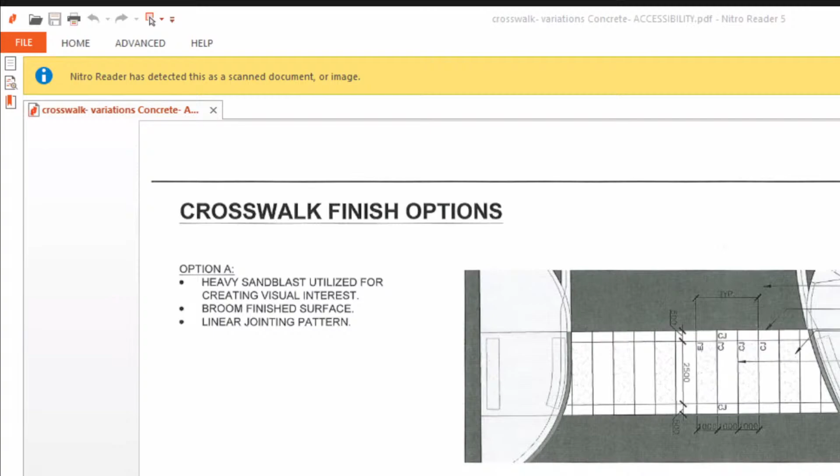Some of these are technical kind of diagrams, but we have some photos as well that we can show you.

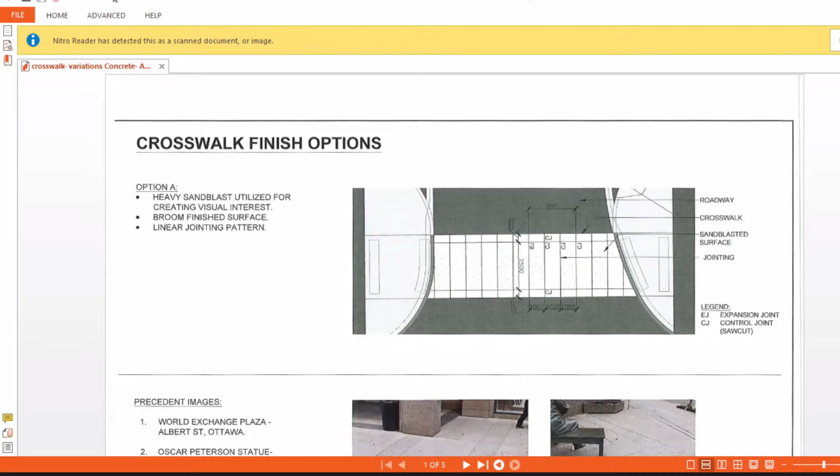I'll try to stick to the four options that you outlined here. So the first option you outlined was to stick with the stamped concrete, which, as I mentioned, is not something that we would recommend. The second option was a brushed concrete finish.

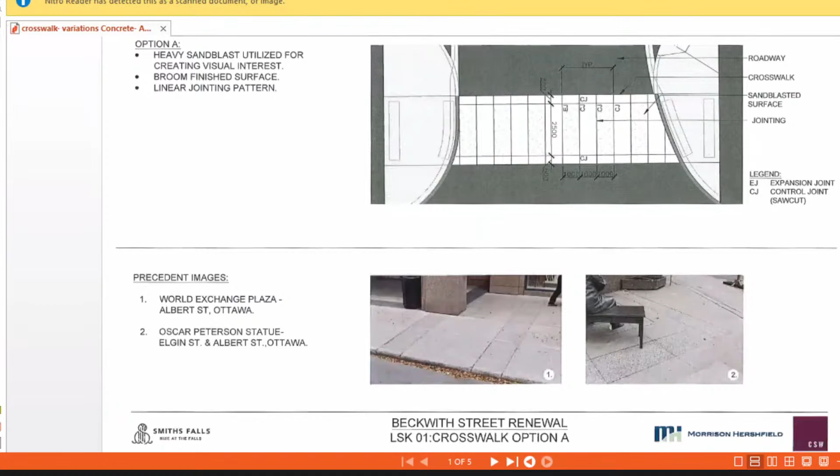So brushed concrete is simply the standard sidewalk finish. It's concrete which is poured, and then as it's drying, it's lightly swept with a brush perpendicular to the path of travel,

and that provides that rough surface that you see on sidewalks, which gives you the best possible surface traction.

As you know, sidewalks generally provide good grip in wet conditions, and maybe less so when there's ice, but there's not much we can do about that other than providing good drainage.

But it provides the best possible traction.

So brushed concrete would look something like this image below here, or this image that Malcolm's got on the screen.

Now, one sort of sub-option of brushed concrete is what you do with the saw cuts. The saw cuts are those lines across the crosswalk, installed to prevent it cracking, because concrete expands and contracts with temperature like anything else. Those lines prevent the concrete from cracking as much as possible.

But it's possible to vary those. This image is a very straightforward saw cut, but it does convey that understanding that this is a crosswalk with the horizontal bars.

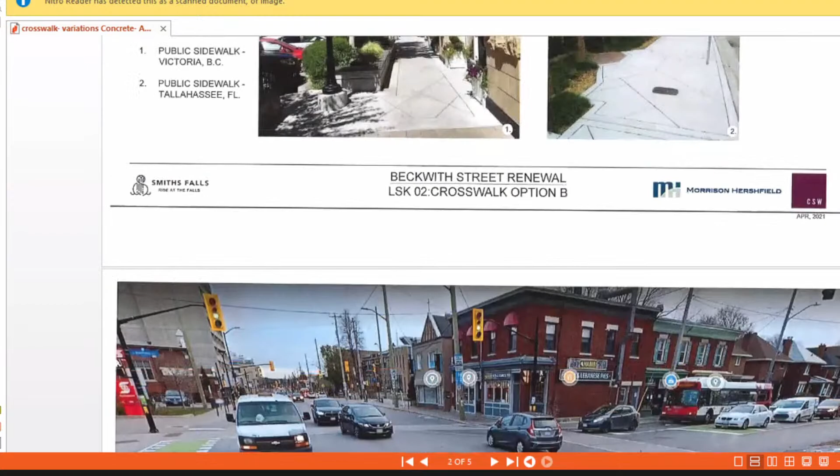I think on the second slide, Malcolm, if you just flip back to it, there was another option that our landscape architect had suggested for more aesthetic appeal. You could saw cut on the diagonal, and there's a couple of images. If you can just scroll down slightly, there's a couple of images at the bottom there of installations along these lines.

This is something that we had drawn up, or a landscape architect had drawn up, to show what could be done. We're not recommending this type of pattern for Beckwith Street.

The concern is that with all of these diagonal lines leading in different directions, it can lead to confusion, particularly for anyone who's visually impaired or has other needs. It could lead to some confusion as to exactly where the crosswalk is going. Better to have straight lines that are either perpendicular or aligned with the path of travel to make it very clear what the alignment of the crosswalk is.

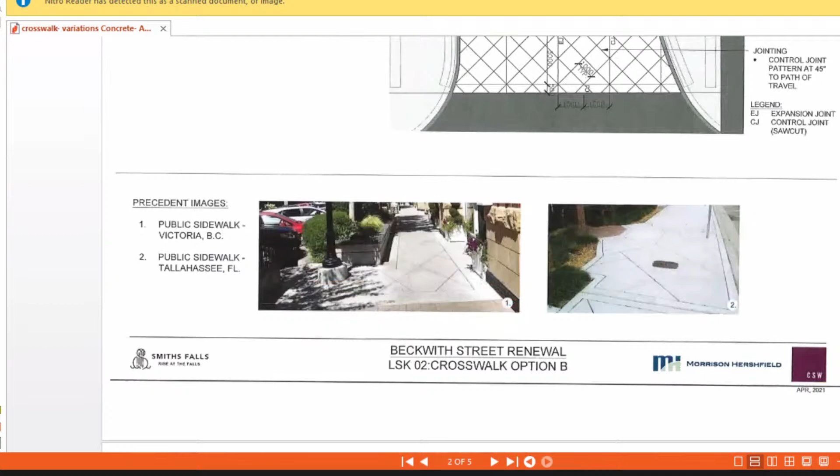So maybe just to clarify, I think our second option here is brushed concrete with a simple saw cut pattern, with lines perpendicular to the path of travel.

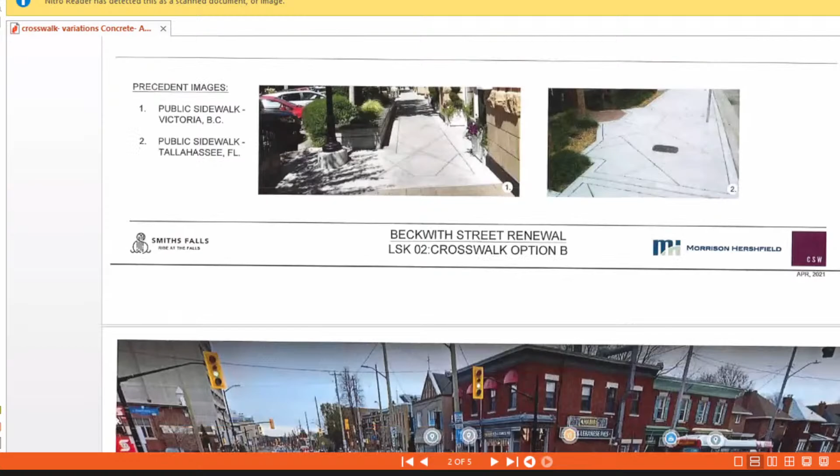Our next option, and the one that we are recommending here, is a sandblast finish. There was a slide for this on maybe the first sheet. Here.

The idea with sandblasting is you pour a standard brushed concrete crosswalk, but then to add some visual interest, to contribute to the aesthetic that the town is looking for on Beckwith Street, using a template, sections of the concrete are sandblasted, which removes some of the finer material. In terms of surface texture, it actually roughens the surface slightly. It doesn't leave it any smoother.

Now, it's possible to sandblast all sorts of intricate patterns, but that wouldn't be appropriate for the roadway because they would get worn down by traffic over time.

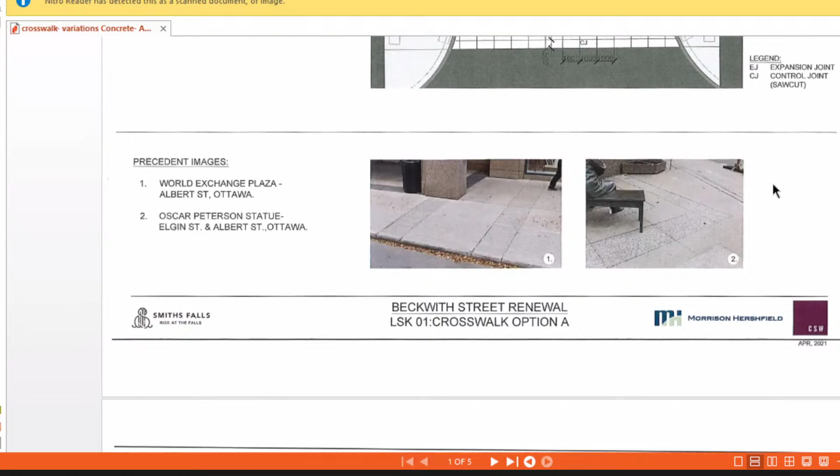So if you can just go up slightly, Malcolm, we're suggesting - it's not totally clear here, it hasn't scanned brilliantly - but the idea is that every second panel would be sandblasted. It's very much a typical crosswalk pattern, the kind of zebra stripe pattern.

But it will just have that slightly elevated visual appearance, which will contribute to the overall aesthetic of the street. And there's no durability impact with this. It's a very minimal amount of material being removed, just to create a slightly different look on some of those panels.

It's a bit like cutting grass. If you cut grass, you can create stripes in your grass by mowing in different directions. It's not changing the grass, it's just changing the appearance of it slightly. And this is what we're recommending here.

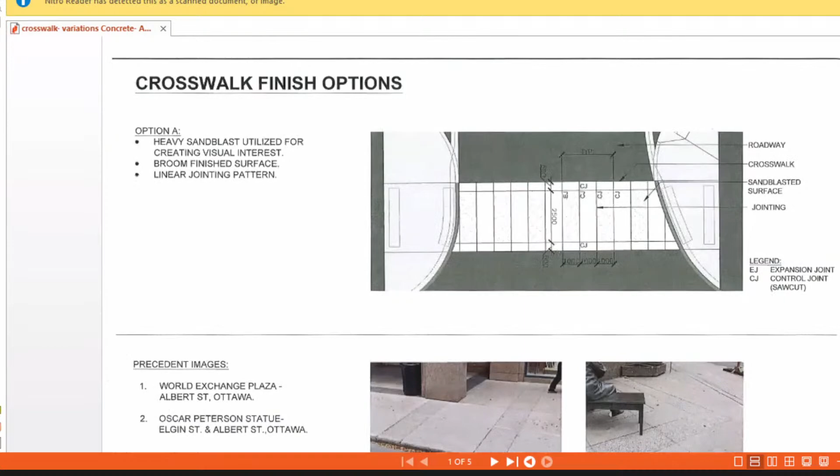And maybe I'll just cover the final option, which would be no concrete at all, just paving straight across the crosswalks. I don't know if we had - yeah, this would be the example. Actually, no, this has concrete. But you can imagine it would be a painted crosswalk on asphalt.

It's a pretty standard approach. It doesn't add anything to the aesthetic of the street. The disadvantage of the painted finish is that the paint wears out and needs to be reapplied at least annually.

And if you catch it when that paint is in need of being renewed, it may be slightly less clear where the crosswalk is. Also, with the painted crosswalks, there's nothing really to give that extra level of attention to motorists, to encourage motorists to really be aware of pedestrians.

There was one other slide in here which had a brick border on it, Malcolm. Maybe I should just comment on that one. Yes, okay, it's the Elgin Street one, I think.

We explored a lot of different options for crosswalks to find something that would help with the aesthetic of the street while achieving the durability, the accessibility, and all the other important objectives for the project. Something that we see done quite frequently is this finish with a brick border on the crosswalks.

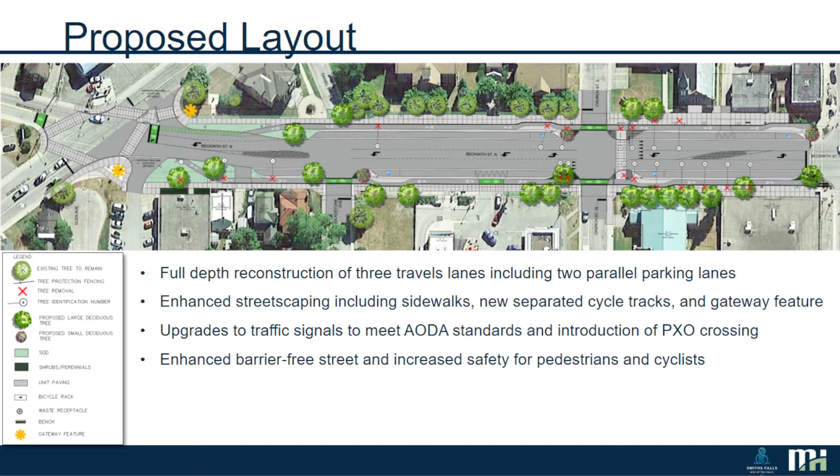Maybe if we can go through 2 more slides. Let's stick on this slide for a moment. So just before we get to the details of the layout, these plans were posted for public consultation on the Speak Up Smiths Falls website.

There were a number of comments received in relation to this issue. There were 4 commenters who requested that this southbound free flow right turn lane from Elmsley to Beckwith not be removed. People were concerned about impacts to traffic. And there was 1 comment expressing support for the removal of that lane, basically expressing support for the proposed design. The reason they gave was near misses that have been experienced by pedestrians.

If we can go forward 2 more slides, there's a plan which will help to explain this, and then I'll come back to the advantages and disadvantages. So on this plan, you can see in some detail the proposed layout. Right now, you may be able to see in the faint gray lines the existing layout.

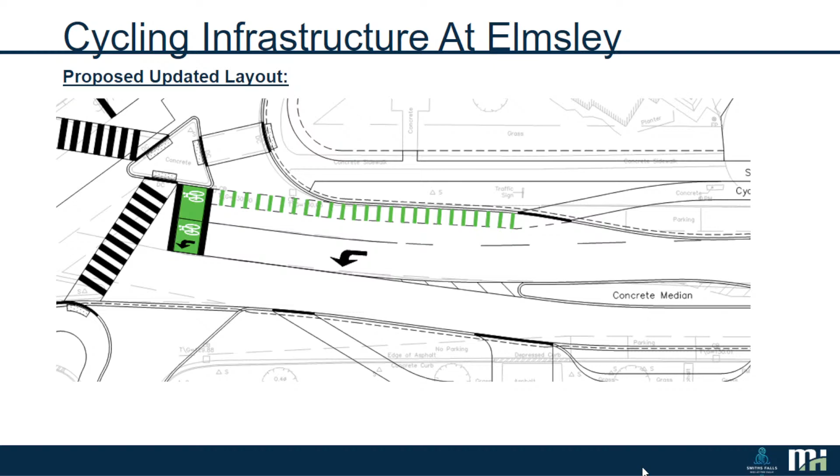Right now, pedestrians have to cross out to that island, and then, if we just go back to the last slide, pedestrians cross out to that island, and then from there they can access the crosswalks to get across the intersection. The proposed design does away with the island and enables pedestrians to cross directly in one movement. And this is all traffic signal controlled, so you wait for the traffic signal and then you cross.

There's some changes to the sidewalk layout, not so much changes, but because of the narrowing of the roadway, the sidewalk moves. But we're able to create that diagonal straight piece of sidewalk, which provides a direct path of travel for pedestrians coming north on Beckwith Street and heading for the crosswalk to continue north.

That area that's created, that's kind of regained from the roadway, is one of two locations being considered for a gateway feature, which would be a landscaping feature. There are various themes and forms that have been considered for that and are still under consideration by the town.

Now, if we can go back to the last slide, I'll just run through the issue. So we presented previously to council in February, and at that meeting we were asked to look in more detail at the pros and cons of the proposed design, or of retaining the current configuration with the free flow right turn lane. In particular, we were asked to complete some traffic analysis modeling to work out what the impact would be to drivers.

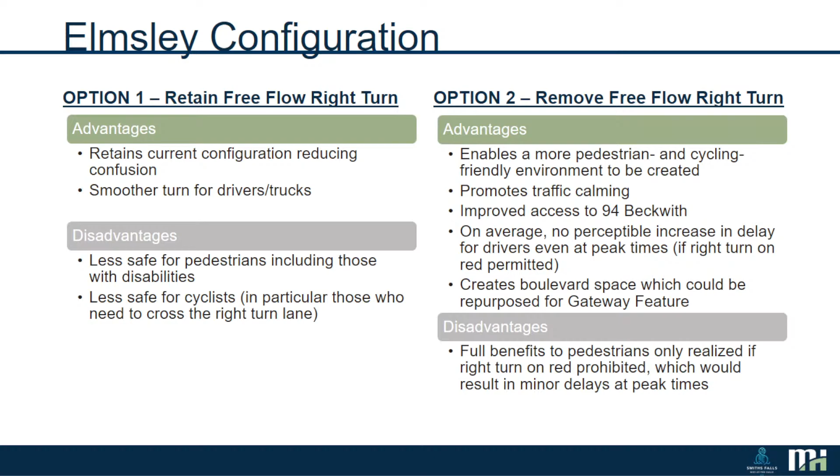Maybe if we just go to the next slide again, and then I'll wrap up on this slide. So again, this is the proposed layout, removing the free flow right.

Based on traffic modeling, the average impact to traffic delay is not going to be noticeable to road users even during peak times. And this is our recommendation, considering that desire to create a more pedestrian and cycling friendly intersection that frames the gateway to Beckwith Street, or the renovated portion of Beckwith Street, and really sets the theme for the street. So I guess council, from the meeting on Monday, committee of the whole, had requested this committee's input on the preferred option.

So again, happy to answer any questions and discuss further.

All right. Could I just have Dave there? Thank you.

And now I can take questions if there are any. Jen.

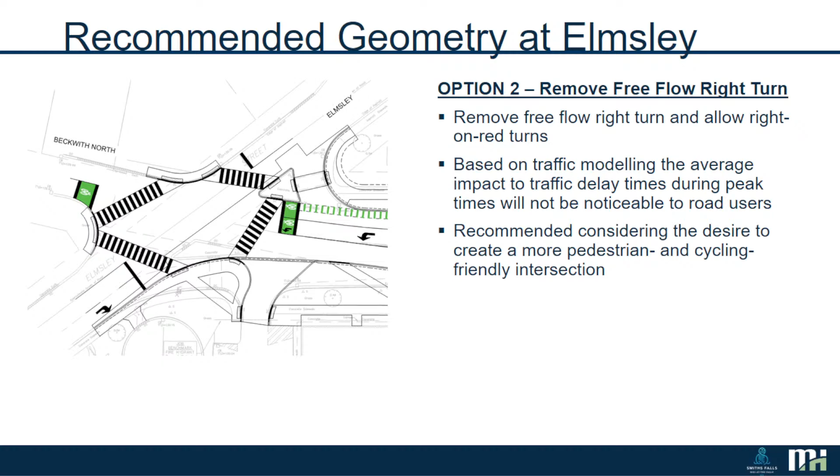I was just wondering, I've used that intersection quite a lot, and crossing from where that plaza is at 94 Beckwith Street to the little island, it was difficult as somebody standing upright. And I was wondering if there was any thoughts as to if it would be even more impactful to somebody in a wheelchair who would be not as tall as obviously somebody who is standing.

I believe it would be, but I'd be very interested in the opinions of this committee on that. I mean, certainly my opinion would be, yes, it's difficult to make that crossing. There's not the best sight line for seeing cars coming around the corner. You do have people coming fairly fast around there. And yeah, to make that crossing, you need to be able to move fairly quickly across that road.

So that's one of the reasons why we're really not recommending that. If we were to take that approach of keeping the free flow right turn, there are things we could do to mitigate that. We could install signage. In fact, on a free flow right like that, where there's a marked crossing, drivers are required to stop for pedestrians, but not everyone knows that. So we can put up the appropriate signage to remind drivers, or we can put in PXO, or pedestrian crossover signage, which makes it very clear.